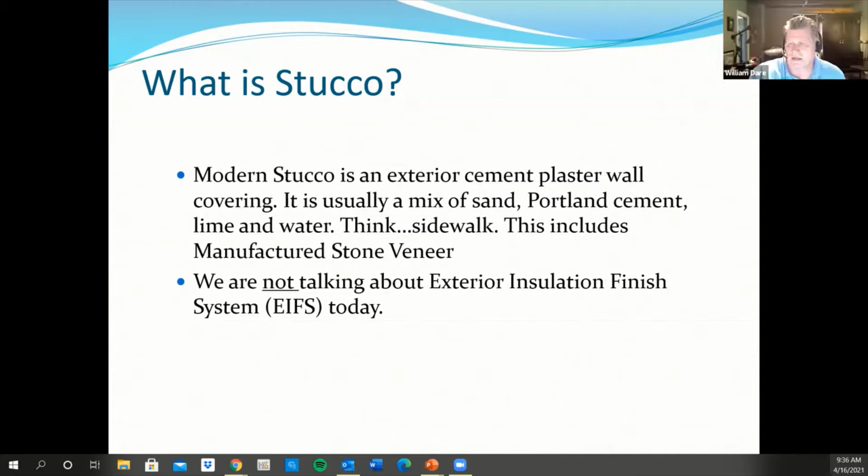Go the other way. So why are you hearing so much about this? And I assume you're hearing about it. Maybe that's a poor assumption, but I think most agents are pretty much not amused by the whole stucco conversation, and would prefer to list a house with vinyl siding. Well, the building boom that occurred, and it's occurring again, and we're kind of seeing much of the same repeat of situation in the building boom that we're experiencing now, as we did in the mid 2000s. And so there's a lot of houses trying to be built in a very short period of time, which means that not everybody's watching as close, and there's a need for contractors.

The higher percentage of homes are built with stucco now. In the city, they've been built with stucco for a long time, but most of that stuff that you see on the older houses is over block or brick. So it's over a masonry substrate, which wasn't really a problem. It's when we started putting it over wood more recently that it becomes quite a problem.

The home inspectors are aware of the problem. So when you're getting a home inspection, if you didn't have to waive every inspection you ever had to do lately, the home inspector is going to talk to you about the stucco installation and the potential for problems. And the increased consumer and professional awareness. I would argue that most real estate agents have had to deal with this on several levels over the years, and have gotten burned by it, maybe even. So it's quite a big problem.

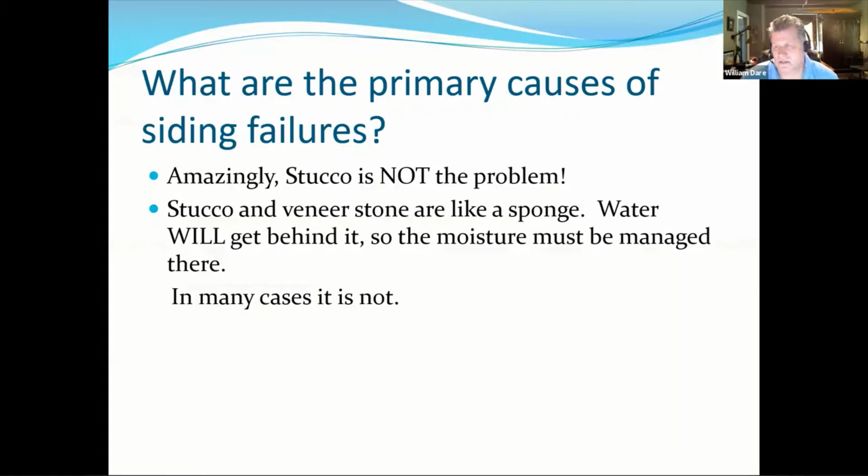The primary causes of siding failures, amazingly, really, the stucco is not technically the issue. The stucco is just in our way. It's not a very forgiving product. The vinyl siding lets a lot of air behind there, so that it tends to dry out, where stucco and veneer stone are like a sponge, and water will get behind it, and the moisture needs to be managed back behind the stucco and stone, and a lot of times it is not.

Oh, there you go. Unskilled, unsupervised labor. Sorry, we just added a line to this slide. Unskilled, unsupervised labor is also a huge problem. I would say that it's a more significant problem in the city of Philadelphia, because it's harder to get contractors to go to Philadelphia because of a lot of different restrictions on parking and travel and whatnot. So my experience with trying to find good contractors in the city of Philadelphia to do the repairs for my clients has been that it's difficult to get good skilled labor into the city. There's just too much more work for them outside of the city, where it's a lot easier. So unskilled, unsupervised labor building these houses.

New building materials: oriented strand board replaced plywood about 15 or 20 years ago, which was a huge impact, because oriented strand board is the plywood that looks like it's big wood chips pressed into a sheet. It's not a very forgiving product. It does not dry out very well, and it tends to rot really fast.

We went to a synthetic building wrap. Back in the old days, we used to use tar paper, which was a really good system of keeping the moisture out, and it also would tend to let the wall dry out if it did get wet. The synthetic wraps are really thin and fixed for what's called a perm rating, so it tends to trap the water back there more readily.

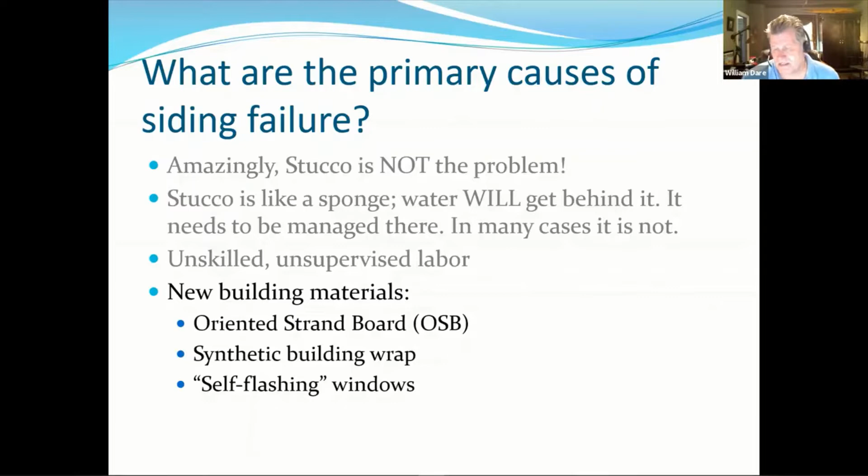And then windows that they said were self-flashing, which tended to not be self-flashing and ended up leaking. They omitted some stuff in these things, sill pan flashings or whatever, that really have created a lot of trouble for us in the construction world. I think it's really important, if you take anything away from this conversation today, these next couple of slides are going to really, hopefully anyway, as real estate agents, put this into perspective for you.

There's two ways that we, and most guys, I would assume, in this industry, evaluate stucco. And the first is, was it installed properly or to industry standard? And I would answer to you that we do over 1,000 stucco inspections a year and another 1,000 plus home inspections a year. And I would say that rarely is it actually installed the way it's supposed to be installed.

Missing details such as weep screeds, soft joints between stucco and dissimilar materials are common. Most stucco is about half as thick as it should be. It's generally about a half an inch to 5/8 of an inch thick, and it's required to be nearly an inch thick, 7/8 is minimum. And that's not the way it's supposed to have been done.

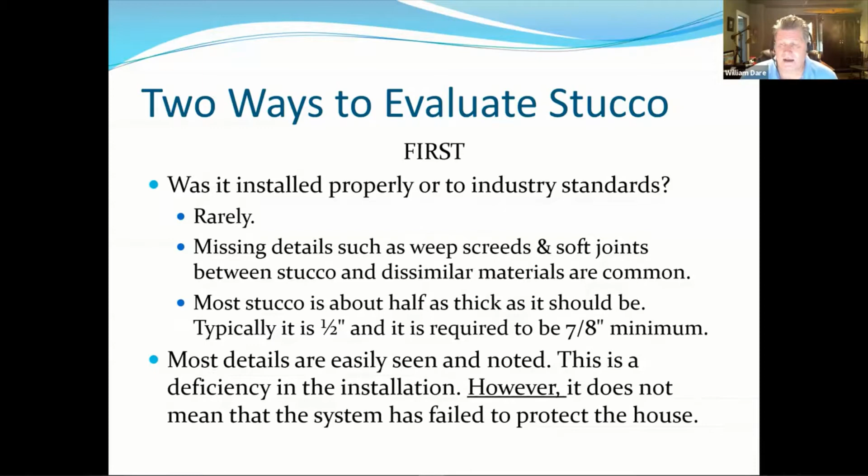Most of these details, other than thickness, are easily seen on a typical home inspection, at a visual inspection. These are deficiencies in installation. However, it does not mean that the system has failed to protect the house. So the first way we're going to evaluate stucco is was it installed right. And unfortunately, a lot of times that's not the case.

The second is the system, most of which is hidden behind the cladding, protecting the structure. Is water getting to the wood in quantity sufficient to cause harm? And this can only really be evaluated through invasive testing. We're going to talk about thermal imaging here in a little bit, but it can only be done, in my humble opinion, through invasive testing by drilling small holes in the cladding and getting back there with a moisture meter, checking the condition of the wood and checking the moisture content in the wood.

Most of this damage is caused by improperly installed windows, doors, and kick-out flashings. There are other areas of damage, but the vast majority of what we see has to do with improperly installed doors, windows, and kick-outs. Kick-out is a flashing detail at the end of a roof wall intersection, and the roof comes down and ends on a wall. There's supposed to be a flashing there. I think I have a picture of it later.

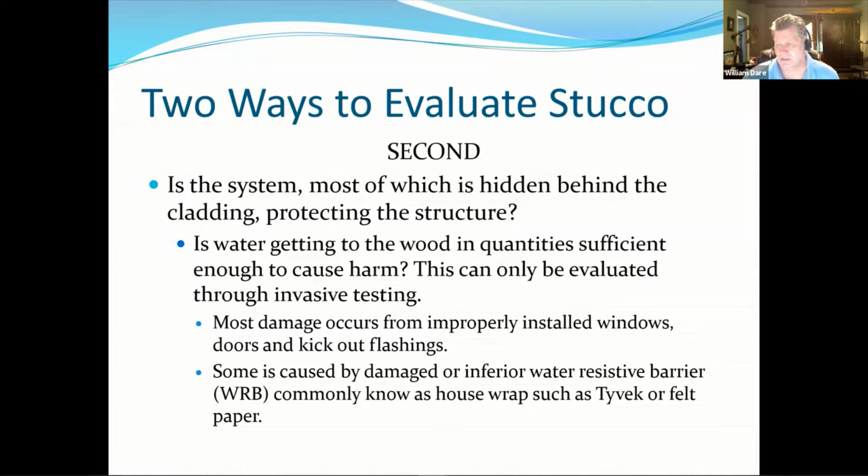Some damage is caused by inferior water resistive barriers, commonly known as house wraps, such as Tyvek, felt paper, Typar is another one. I don't want to impugn any particular product. They're all struggling with this, and it has a lot more to do with how that was installed than the actual product.

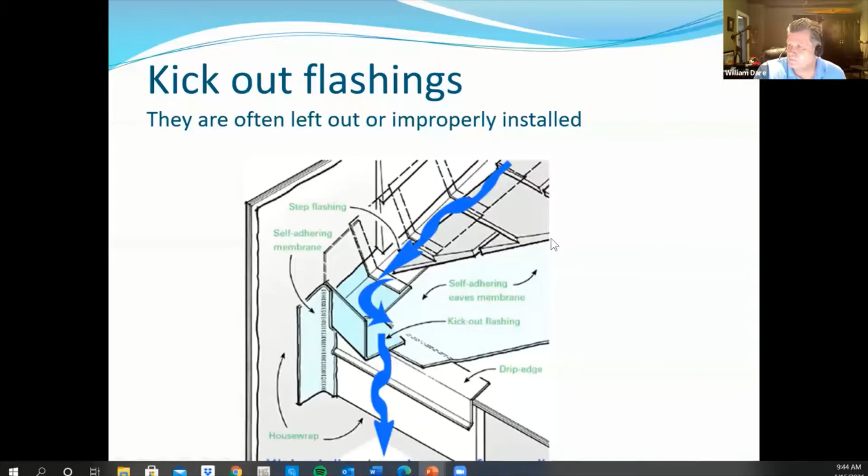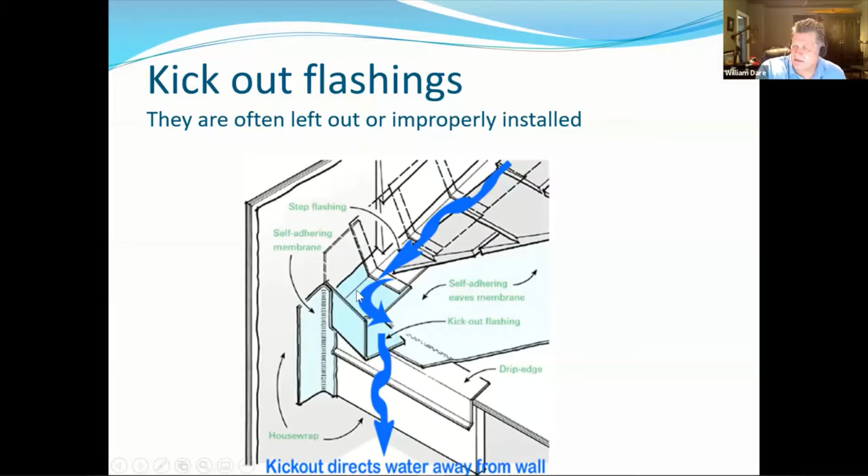So this is a kick-out flashing. You can see the water comes down. This is the wall up here. Can you see my cursor? And then this is the roof here, and this flashing detail in green and in light teal here is supposed to direct the water out from behind the siding material.

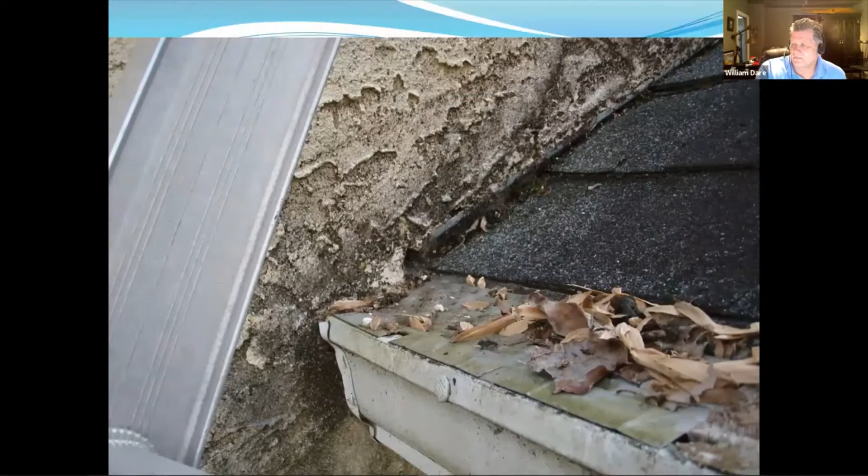This is the actual location. You can see the gutter down here, the shingles to the right, and the stucco up here. And you can see that behind that is about a half an inch of material that the water can get behind. And this is what it looks like with the stucco removed. So these are called step flashings. The paper's supposed to come out, and then the kick-out flashing is supposed to be down here.

And this is what happens when it's not properly installed or left out altogether, which is very common. As you can see, all this wood rot. This is the side of a chimney. So the kick-out flashing is one of the most dramatic, concentrated problem areas for us in a stucco inspection. And I will say that this is hugely common for anytime there's this location. We find this a high percentage of the time. We find damage or moisture below there.

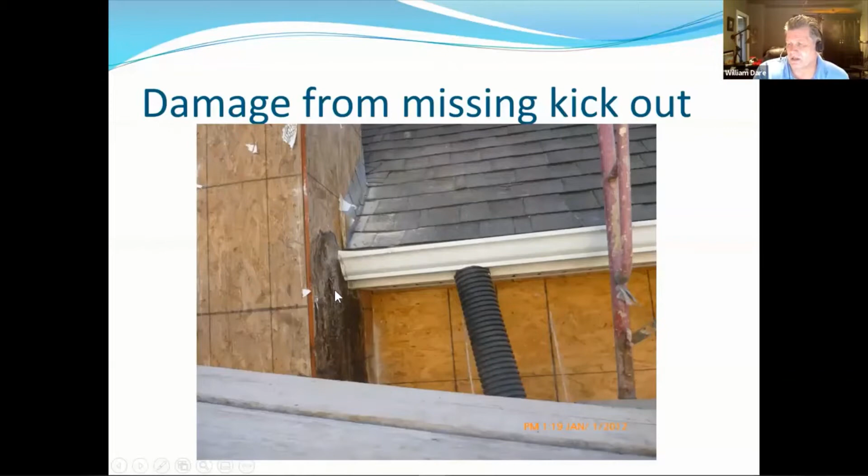What's happening behind the stucco? Primarily the OSB sheeting or the wood sheathing is getting wet and rotting away. One of the things in that video we talked about is the different types of substrate behind the stucco. So anything built in the last 20 or 25 years is going to have OSB or plywood typically.

But back in the early days, being the 70s, 80s, and really early 90s, they may have used rigid foam, they may have used exterior grade gypsum, Homasote. These things really hold up pretty well to moisture because they technically have a secondary barrier embedded on them that helps them prevent water from soaking in, and they don't deteriorate like wood. So when we get to wood, that's where our problems really begin, and with OSB, it really accelerated.

So the OSB sheeting is getting wet. Now, it's not the end of the world because nobody ever promised you the wall would never get wet. However, it can't get wet all the time, and it can't stay wet for very long before the problems start to creep up. In many cases, this will produce wood rot and potentially mold growth in the OSB. Occasionally, the framing and the drywall gets impacted.

I was on a case 2 days ago, and they pulled it off, and there was all kinds of spore-like growth growing on the back of the drywall. That is not very common, but it does happen occasionally. This generally takes place in the first 3 to 5 years. I've seen it as fast as 18 months. We did a house a while back that was 18 months old, and it had already started to deteriorate.

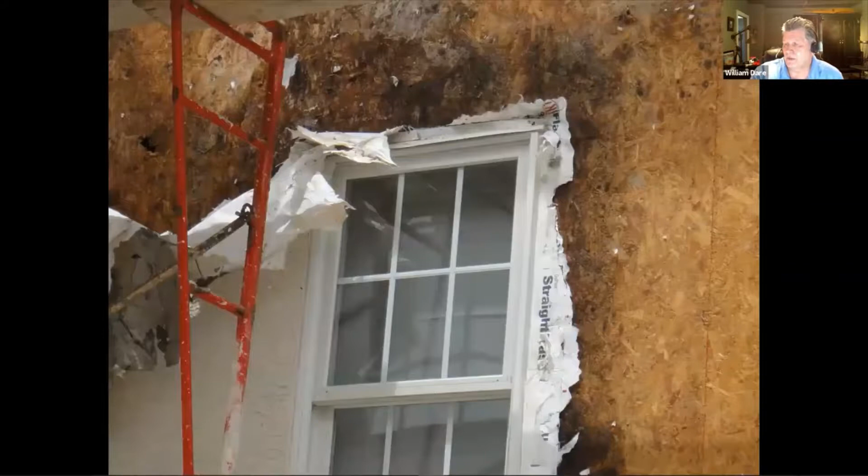So here's some horror story pictures. I wish this was uncommon. Unfortunately, virtually every day I'm somewhere where they're taking stucco off of a house to see the damage. A lot of the recent stuff is involved in litigation, so I can't share it. But this house I think was about 3.5 to 4 years old when they took this apart.

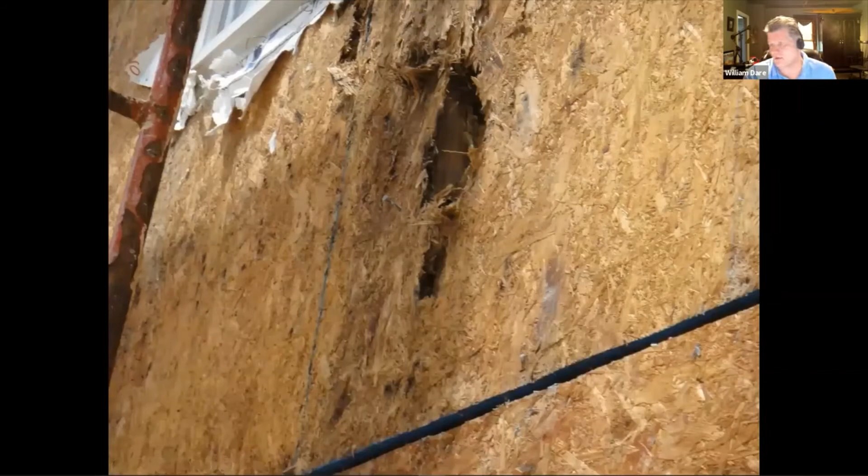You can see that it has DuPont Tyvek on it. The head flashing is improperly lapped. The paper goes behind it. This damage above the window is actually being caused by the window above that. The OSB deteriorates rather rapidly, so we get a large amount of damage in a really confined area, and then it kind of tends to spread out.

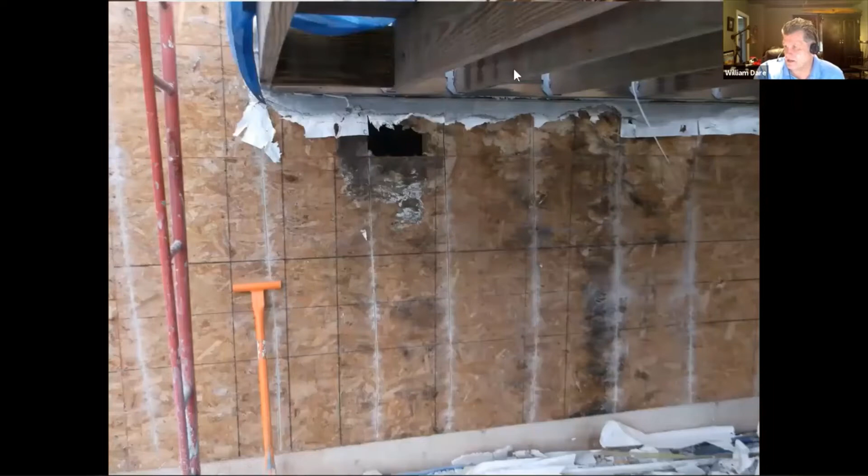This is a deck ledger above here, and then there's a door just above that, a big slider, and at the corners of the door you can see where the water is coming down and damaging the stucco because the deck was not properly flashed and the door was not properly flashed.

This is about as bad as it gets. The OSB, you can actually see the insulation poking through here. So this was a complete failure of the house wrap that was on there. There were too many holes in it, too much water. This is, I believe, a north facing wall, because the direction a wall faces plays a role in this. If we get a lot of sun on the wall, we don't see quite as much deterioration, but this is not, I would say, typical to what we see. This is an extreme case.

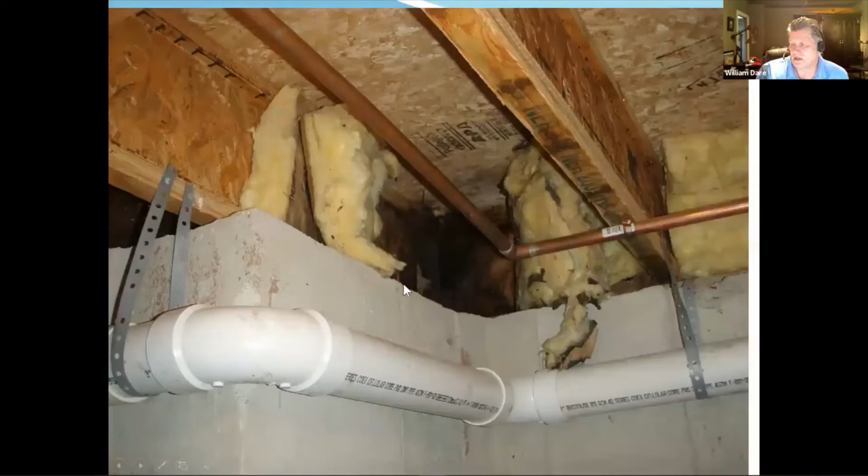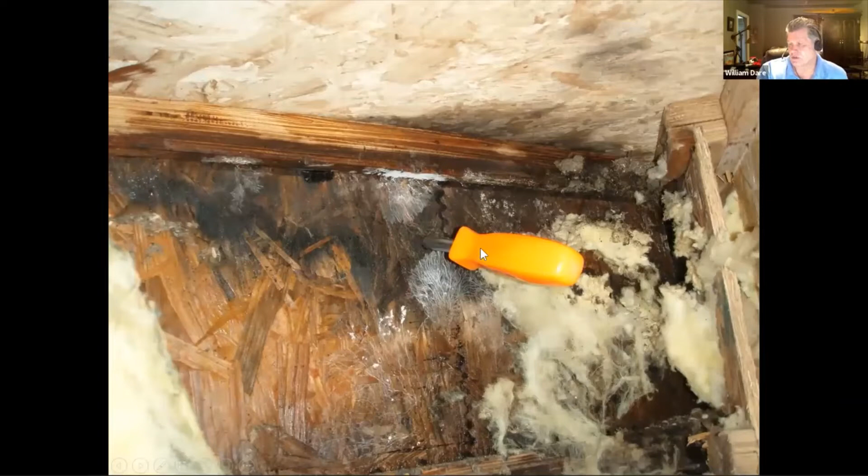I'm going to show you the pictures after this, but this is what this house looked like when we just did a home inspection on this house. And inside on this home inspection, you can see this damage up in this corner. This is directly below that bump out window we just saw. And this is structural damage to the floor joists. These are TJI floor joists, and you can literally stick a screwdriver right through them. We're not allowed to call it mold, we have to call it a spore-like growth, but that's probably a mold growing on there.

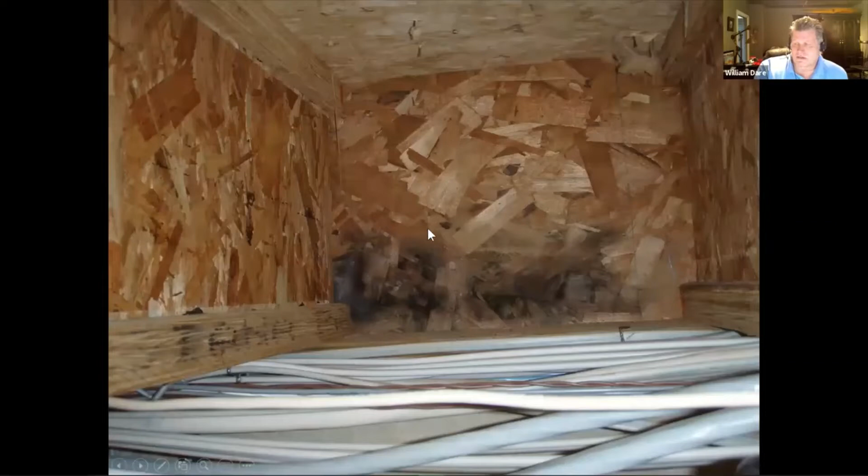This is the subfloor up here. This is the rim board. It's important to know that that piece of wood is nearly 1.5 inches thick, and it's rotted far worse on the outside than the inside. So these are things that a typical home inspector should be picking up for you on a home inspection, looking at a stucco or a veneer stone house, to try to clue you in that there's more problems on the outside.

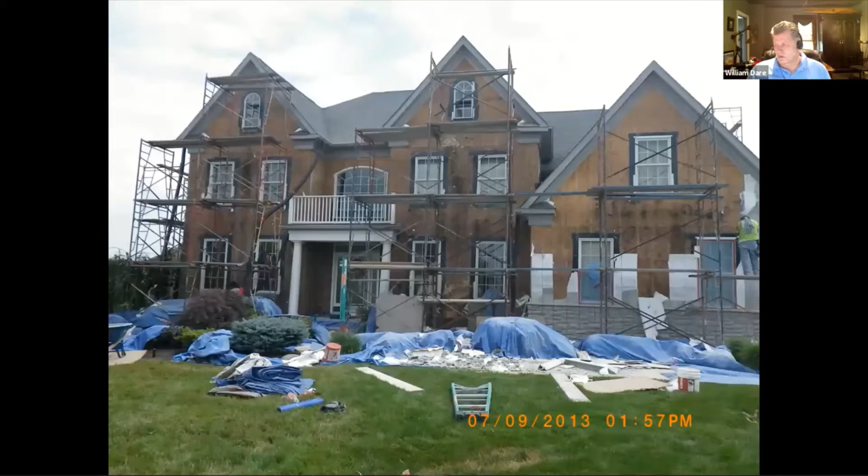So we want to basically help ourselves the best we can to come to a point where we can call for that further evaluation. This house was less than 4 years old when this happened. They took all the stucco off of the house. This was a failure of the house wrap, so there was no drainage mat behind the stucco. This whole development basically looked like this. It was a really big problem, obviously, for these homeowners.

I believe an insurance company for the builder stepped up on most of these and helped offset the cost of this, but this was, I believe, about a $190,000 stucco remediation on this one particular house, and most of the houses in this development exceeded $150,000. So these numbers are staggering. They're mind-boggling, and they're difficult to deal with.

So this is why this course is important, why your understanding of the problem is important, so that you can help guide your clients, whether they're buying or selling, as to how to best manage this data. In the video that you couldn't hear, we did talk about having this done as a pre-listing.

And I think, again, if you have a great inspector and you know they're doing a great job for you, this is not a commercial for Spotlight. We're just trying to help you, give you the data the best we can. Just keep using your inspector.

However, the ability to do this before the house hits the marketplace, the ability to understand these problems while it's still not listed and we have the opportunity to make repairs at our own pace and at our own cost, versus having the buyer dictate how you're going to fix the house and how much money they're going to give you. Because I know a lot of buyers, and I've never really met one that would accept $10,000 for a $10,000 problem. They want $10,000 and enough to go to Disneyland on top of it. So having the information in advance and being able to manage it in advance is critical.

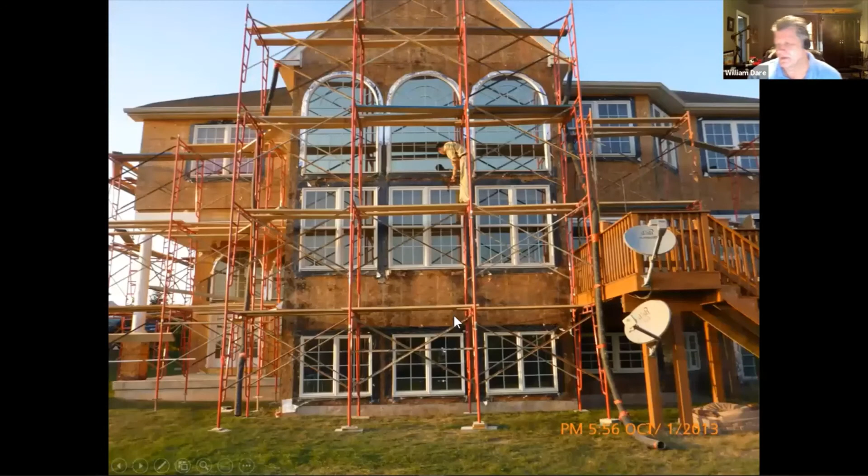This is that same development, a different house, same idea. And I don't know whoever thought it was a great idea to build a wall 35 feet high, no overhang on the roof, and put a bunch of windows in it. But this is what you get when you do that. So again, these houses are only 4 years old or so, and we have this amount of damage.

This is kind of what it looks like under the window. So they taped the bottom of the window, which is incorrect. Now, none of this you can see on a typical home inspection or even on a typical stucco inspection. This is just because the stucco has been removed to get a clue. The water was already behind this from above and came down and rotted out behind the window.

What I think you need to understand, or what your inspector needs to understand, is where you drill the hole to test this is critical. We've come behind a number of inspectors that didn't understand that they needed to be about 6 to 8 inches down and out on this corner. They need to drop down outside the corner of the window about 6 to 8 inches down and be testing here. There's plenty of houses where the wood right up under here is good.

So I've seen inspectors test way in from the corner and close to the bottom of the window where they're never going to find the problem. The problem exists out here to the right of the window in this particular case, or the left if we were looking at the other side. If you look at the previous picture here, you can see all the damage occurs on this particular house, and in most houses, at the corners of the windows.

And if you drill too close to those windows, you're not going to find it in a lot of cases. So we want to understand that the experience of the stucco inspector is important, that he knows where to put those probes to find the problem. Because if I drill over here, or if I drill over here, I'm not going to find a problem.

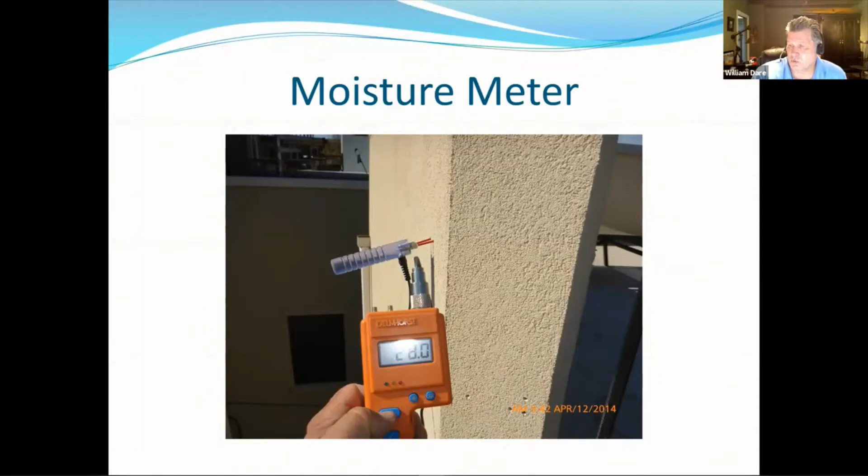So that's how we test the moisture content. And we're also testing the substrate, the wood and the framing below there. There's what the holes look like once they're caulked. People are really freaked out by it, worried that they're going to see them. If I didn't point them out to you, if I just showed you this picture and asked you to find them, you'd be hard pressed. And we're within a foot of that wall. We're not standing back at the sidewalk.

So generally speaking, unless it's an unusual color, we carry dozens and dozens of tubes of caulk, different colors, to try to make that as benign as we can. This is what the core looks like when you drill in, when the wood's all rotted. That's an entertaining picture. If you're a seller and I tell you you've got rotted wood and I show you that picture, are you convinced?

More than likely, we don't have much trouble once we get to the core picture for the seller. Remember, we're working a lot of times for the buyer, and the seller doesn't believe anything the home inspector says. What's he know? He's an idiot. So this gets us to that point where we can talk to the seller really quickly and say, look, here's the picture of the rotted wood. It's easy to understand, it's easy to see, and it makes the point. And then we can get on to the conversation about what's next. So that's what a core looks like. It looks huge in this picture, but it's the size of a quarter.

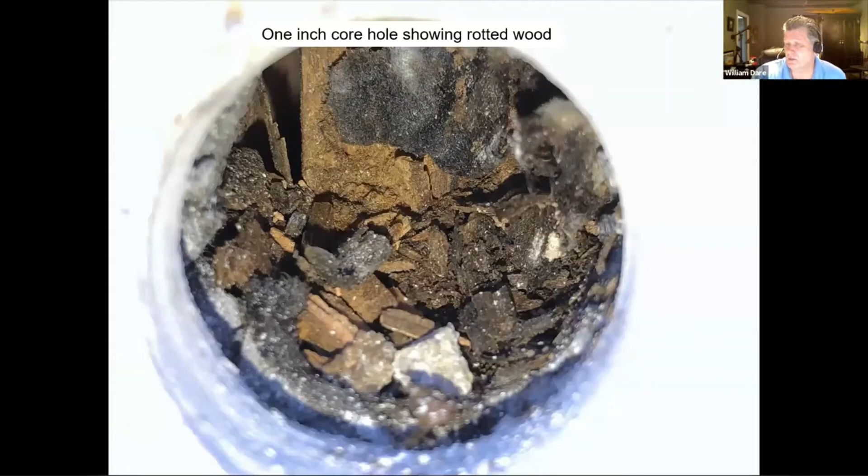Moisture readings approaching or above 20% promote wood growth, mold growth, and wood rot. We talked about that. That's according to the American Plywood Association. This is not Bill's world. We're going to always draw from smarter people than me. So the American Plywood Association says at 20% and higher, you have this. Now the meter has a plus or minus of 2%, so that's why we use 18%.

If you gave the meter a lot of data about what temperature the substrate is, what species of wood it is, there's a chart that'll help you adjust the actual reading to an adjusted reading. We're not going to know all those things. It's OSB, it could be anything. We don't know what kind of wood it is. We don't know what temperature it is. So we're just going to use the 18% because that gets us into an area where I'm confident that we're going to be accurate and know what we need to know.

Soft damaged wood cannot be ignored, although typically there's no need to rush the repair. I think that's an important point. I have this conversation almost every day with somebody that's like, oh my gosh, I have problems behind my stucco, what do I need to do? Now, sometimes, like that staircase we talked about where I thought it was in danger of coming off the wall, I think they needed to act more quickly. But the vast majority of the stucco inspections that we do, the repair does not need to happen this year. If they wanted to wait a year or two, fine. Once we get to 3 or 4, it starts to bother me because I think they forget about it and it never happens.

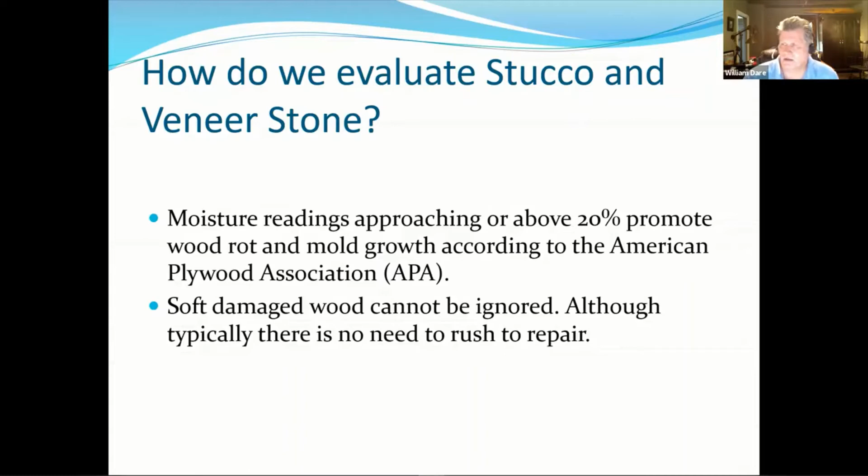Quick question. Yes, sir. I've unfortunately had to deal with a number of these, and my apologies if you touched on this previously, I came in a little late, but what I found is there's a huge price difference between stucco remediators. One of the best deals we found on a particular project came out to 11,000, and we had quotes of 75 plus. All the groups in that higher price frame were only interested in doing a complete stucco remediation, whereas the gentleman we found was willing to patch the areas that actually had the issues, remove the plywood, put more plywood in, and match it as best they could, which they did a pretty good job.

Obviously sunlight changes the color a little bit, but what are your thoughts on that? Why the huge price discrepancy, and your thoughts on patching versus the whole remediation? Well, it's a great question and it's very insightful because we deal with this a lot. My personal opinion on cutting around a window or a door in an attempt to not take the stucco off of that particular wall assembly is that it tends to be problematic. Can it be done correctly? Yes. Is it often done correctly? No.

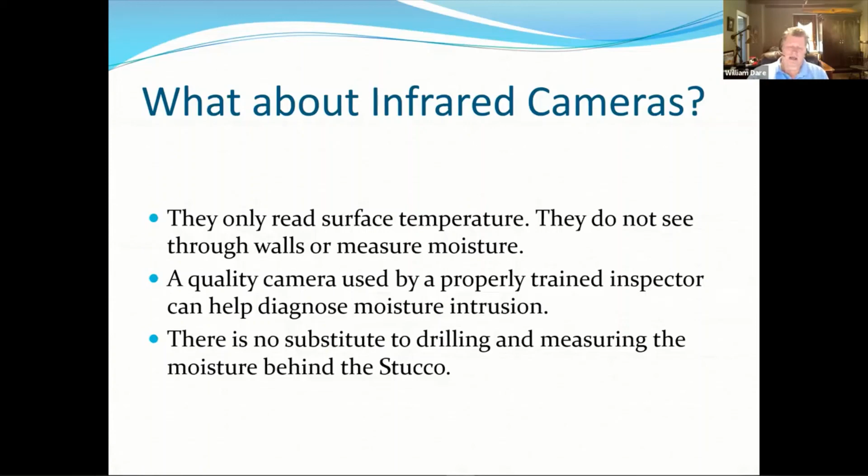Many of the homes being repaired today will fail again. This is an unfortunate reality. Again, I said that the cutouts around windows and doors have a really high fail rate, in excess of 60%. If I told you what I really thought, you wouldn't believe me, so I'll just keep it to myself.

Veneer stone is worse than stucco, so the lick 'em stick 'em stone, it's called MSV, manufactured stone veneer. If you want to sound really knowledgeable, if you tell an inspector, hey, what about the MSV, they will be impressed. So manufactured stone veneer, abbreviated MSV, is worse because it holds more water. It's not smooth. The water lays in the mortar joints, so we can actually have significantly more damage behind the manufactured stone veneer.

True brick and stacked stone are installed differently, or at least they should be, with a space between the back of the stone and the brick. So this significantly reduces the risk factor. We don't see nearly the problems behind those, although they can have them, that we see behind stucco and MSV.